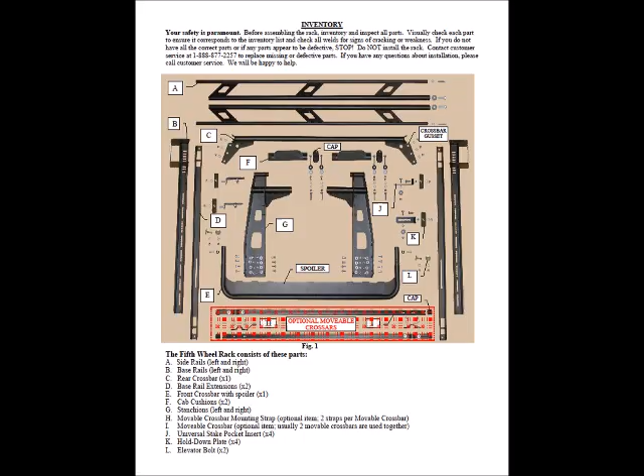Carefully read the written specifications and safe loading requirements and the warranty. Then examine the inventory list. Unwrap and examine each part and compare it with the inventory list. If you find any cracked, broken, or otherwise defective parts, are missing any parts, or have any installation questions, contact US Rack at the toll-free number. We are here to help.

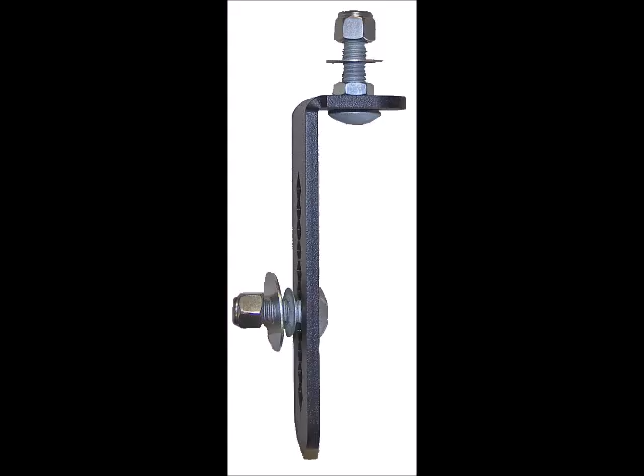The first step is to prepare the stake pocket inserts for installation into the front and into the second stake pocket on each bed rail. Disassemble each insert into its components as shown, and notice the 3 diamond-shaped holes in one end of the insert that will be used to install a carriage bolt. These holes provide a choice of positions on where each bolt will emerge from the stake pocket to anchor the rack to the truck bed rail.

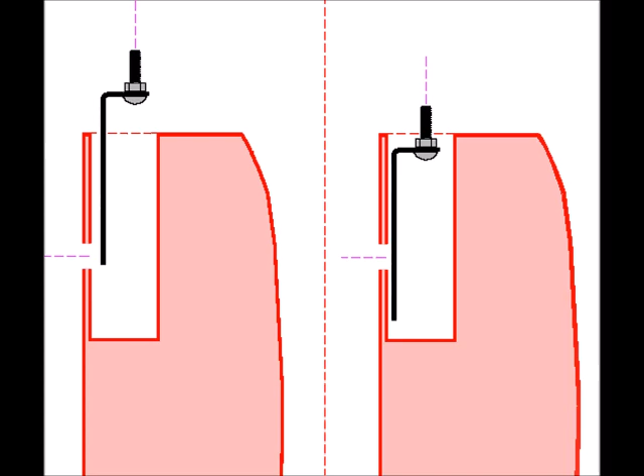Screw a jam nut, which is the thinnest of the nuts, all the way down on the bolt to hold it in place. Holding the insert by the bolt, lower it into the stake pocket so the top of the nut is just below the top of the bed rail. You may mark the insert with a pencil through the hole that leads from the bed into the side of the stake pocket. Remove the insert and install a bolt at the location you marked and hold it in place with a thin retaining washer.

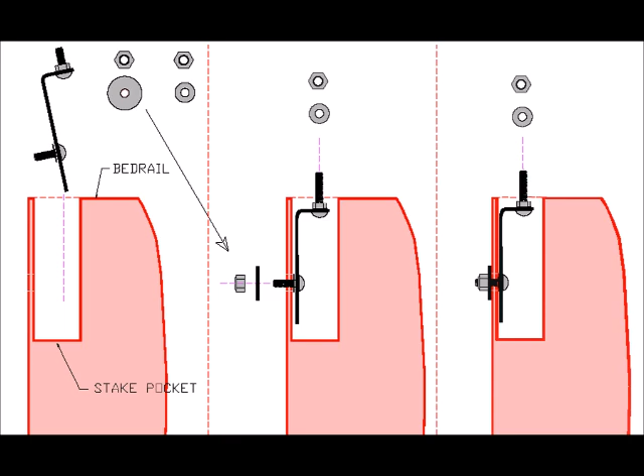Place the insert back down into the stake pocket so this bolt extends through the side hole, and place a 1.5 inch washer on the bolt and loosely thread on a nylon lock nut. Pull up on the insert to make sure the top of the jam nut remains about 1/4 inch below the bed rail when upward force is applied. Then tighten the nylon lock nut firmly. Note that even after applying a dab of grease on the screw, you must overcome the resistance of breaking through the nylon ring on each lock nut to fully tighten it. Install all 4 inserts so they appear as shown here.

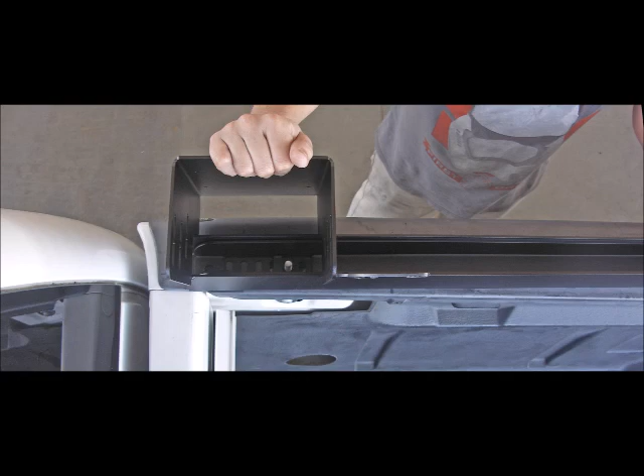Next, install the base rails B from the inventory list and the extensions D shown here. Notice that the extension is narrower than the base rail and sits down inside of it. Place a base rail on the bed rail so the front of the base rail is about even with the front of the bed rail, and so the stake pocket insert bolt goes up through one of the many holes in the base rail. The variety of holes in the base rail provides choices on how far from the edge of the bed rail the base rail will sit.

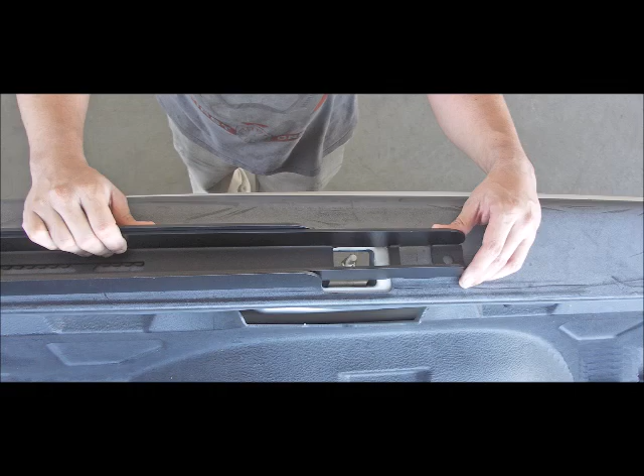Adjust the extension so the bolt extending up from the front stake pocket also goes through one of the large rectangular holes at the front of the extension, and so the bolt in the second stake pocket goes up through one of the holes in the other end of the extension. A hold-down plate will be required to cover the large rectangular holes in the extension. To secure parts in position, place a hold-down plate on each bolt, then add a metal washer and tighten loosely with a nylon lock nut.

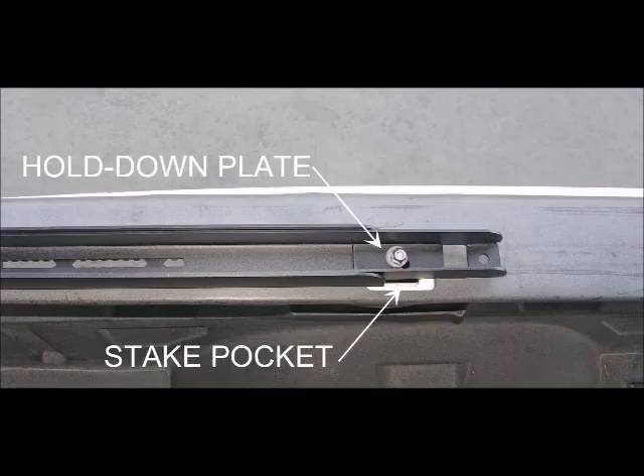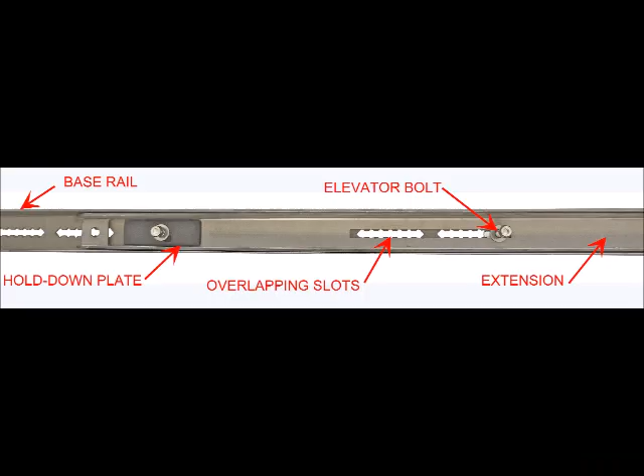With some trucks, the distance between the stake pockets is longer than the extension. This requires the use of elevator bolts to convert the base rail and extension into one rigid assembly that can span both pockets. See how the parts are locked together using the elevator bolts, hold-down plates, washers, and nuts.

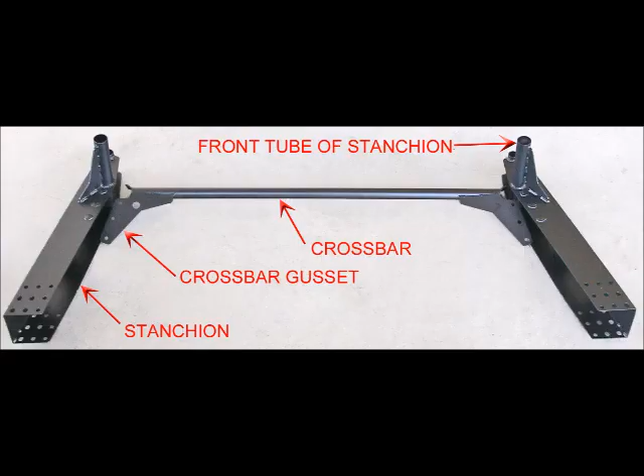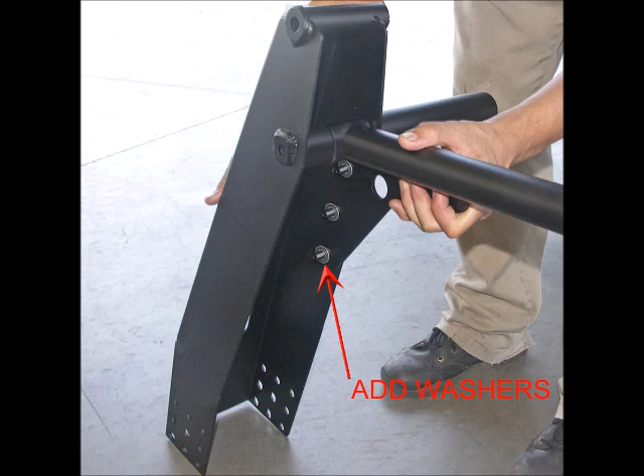Next, install a crossbar D on the inventory list to the 2 stanchions G. To initially orient these parts, place them on the ground as shown, and notice that the 2 crossbar gussets are welded to the front of the crossbar. Stand up the stanchions and align the threaded studs on the inside with the holes in the crossbar gussets. Slide the parts together and place metal washers on the studs. Thread nylon lock nuts onto the studs and tighten loosely.

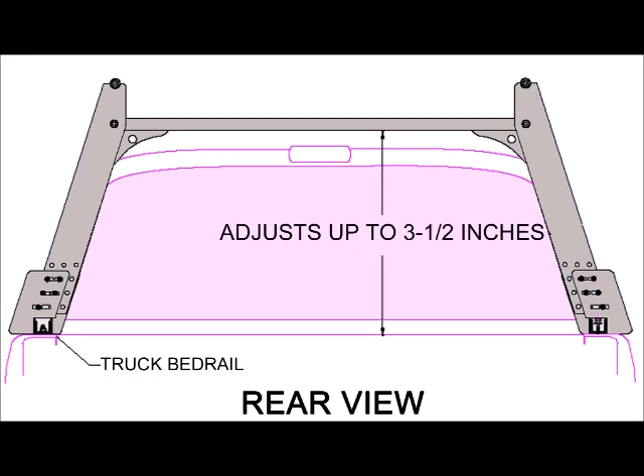To mount the stanchion and crossbar assembly, step up into the bed and slide the bottoms of the stanchions down between the sides of the stanchion housings, which are welded to the front of each base rail. Lower the assembly down to where the bottom of the crossbar is 3 to 4 inches above the roof of the cab, while aligning the holes in the stanchions with the slots in the housings.

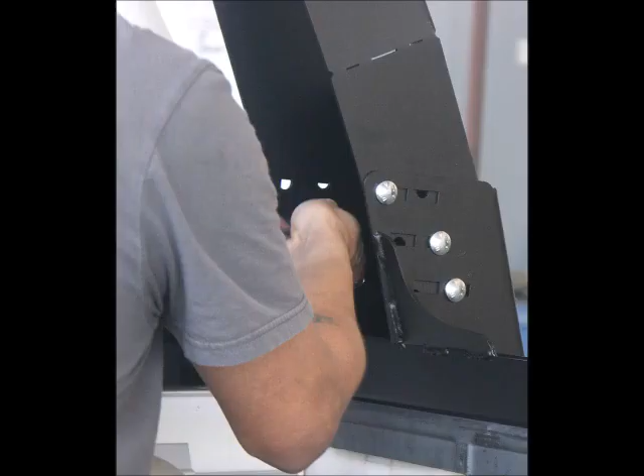To find the right position, it may be necessary to move the base rails closer together or farther apart, by adjusting which holes in the bottom of the base rails the stake pocket insert bolts go through, or by moving the positions of the bolts in the inserts themselves. When the height and width is correct, insert 1-inch long carriage bolts into both sides of the stanchion housings to intercept and hold the stanchions in place. Tighten them, but not too firmly.

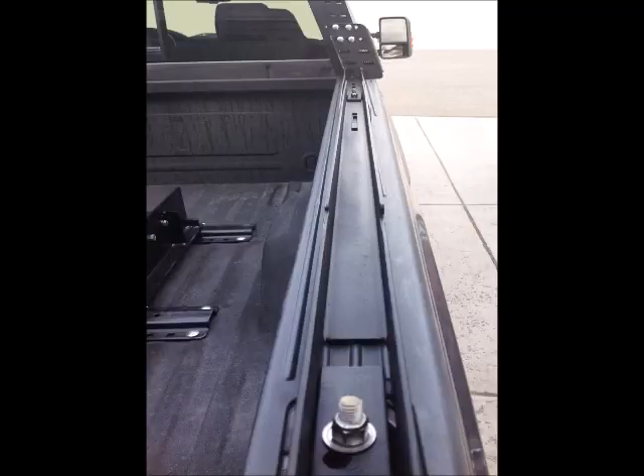Important note: there must be an overlap of at least 2 rows of holes and slots with at least 3 carriage bolts holding the parts to the front and back of the stanchion housings. For maximum stability, ensure that the bolts are spread out as much as possible in the available overlapping holes and slots. Next, attach the side rails A and cab cushions F.

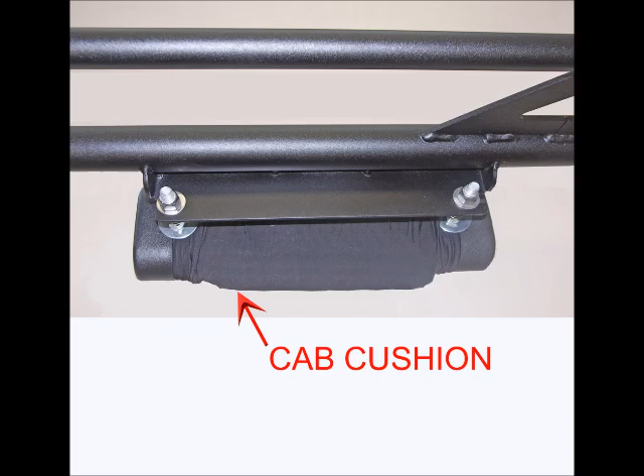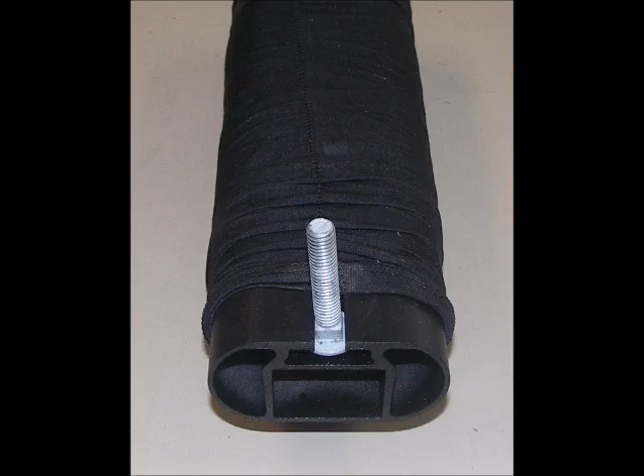Notice that each side rail contains a mounting bracket for the cab cushion. The cab cushion has a number of parts and tools needed to assemble it. There are 2 lengths of carriage bolts. Initially, use only the short 1.5-inch long carriage bolts. Slide them into the ends of the black extruded aluminum body of the cab cushion and pull the black nylon cover up around the bolts and slide on the plastic end caps until they make contact with the bolt.

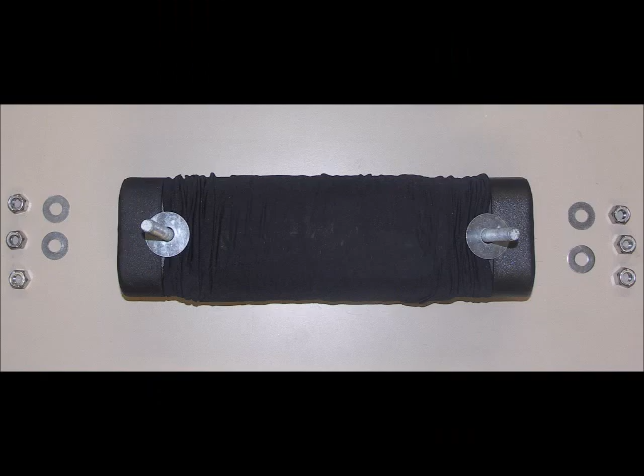Push a rubber washer onto the end of the bolt. This is a tight fit. Place a 1.25-inch OD metal washer on top. These washers will hold the nylon cover and end caps in place. Slide the ends of the bolts into the slots of the mounting bracket. Add small washers and screw on the lock nuts. Screw down each nut far enough to retain the cab cushion in the bracket, but don't yet firmly tighten, for you may have to remove and adjust them later.

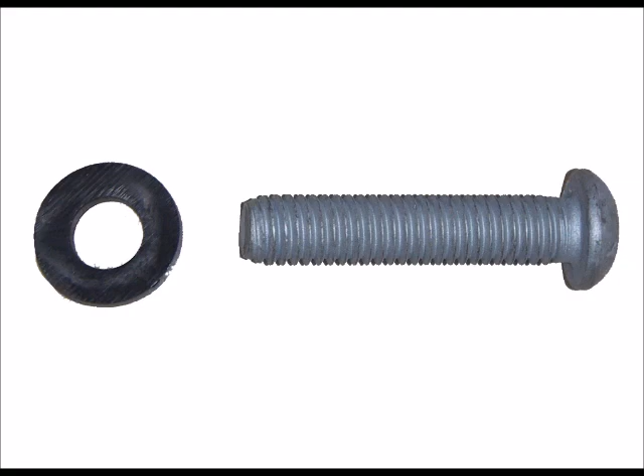To install the side rails over the truck cab, insert the threaded ends of the rails into the tubes extending from the front of the stanchions while ensuring that the cab cushions are on the inside of the rails. Place a black nylon washer onto a 3/8 by 1 3/4-inch long button head cap screw. Insert the screw into the lower hole at the back of the stanchion until it contacts the end of the side rail. Thread it in to the back of the side rail a few turns, but leave it loose.

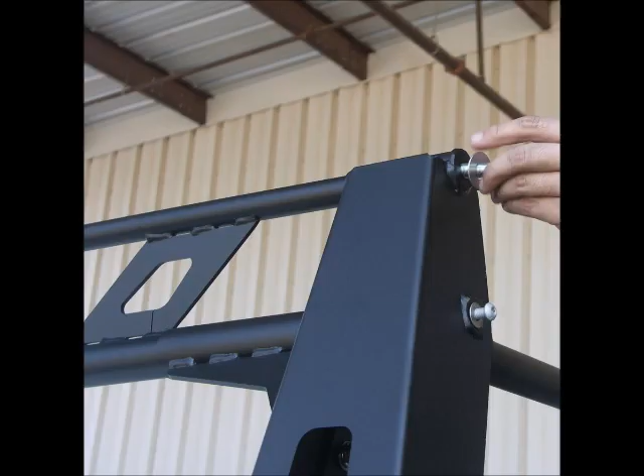Insert the larger fine thread hex screw with a metal washer into the top hole to intercept the threaded end of the other tube and thread it in a few turns. Now tighten the lower screw firmly with the Allen wrench. Tighten the upper screw with a hex wrench. Note that this screw is used to adjust the elevation of the side rail, so don't tighten it more than is necessary to make the side rails roughly parallel to the ground.

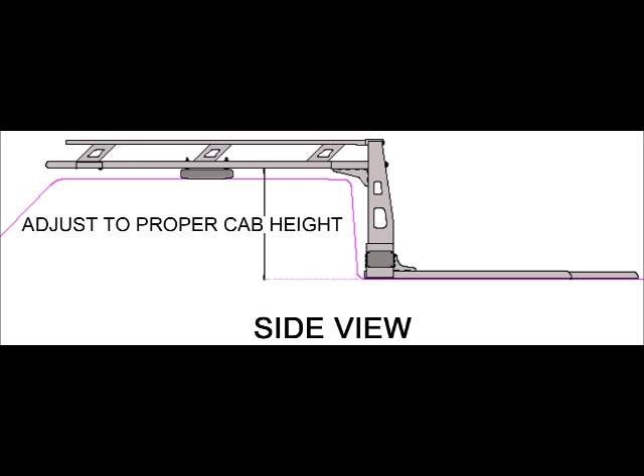If you still need to raise the cushion more, you should raise the stanchions to a higher position in the stanchion housing. If you want less gap above the cab, you may lower the cab cushions by about 1/2 inch by adding a nylon lock nut and washer to the carriage bolts of the cab cushion just below the mounting bracket. If this is still insufficient to bring the cab cushions down to the proper position over the cab, replace the 1.5-inch bolts with 2.5-inch bolts and add another lock nut below the mounting bracket.

Note that the space between the 2 lock nuts can be adjusted to create more or less standoff above the cab. If there is still too much space, remove the bolts and lower the stanchion to lower slots in the stanchion housing. Next, install the front crossbar E in the inventory. Holding the crossbar with the flat spoiler on the bottom, insert the ends of the crossbar into the front of the side rails and shove them almost all the way into the side rails.

Squeeze a modest amount of flexible caulk around the perimeter of the smaller tube to keep water out of the tubes. Then shove them all the way in until the holes in the bottom side of the crossbars and the side rails align. Place a black nylon washer onto a 1.5-inch long button head cap screw and tighten firmly with the Allen wrench, then wipe off any excess caulk.

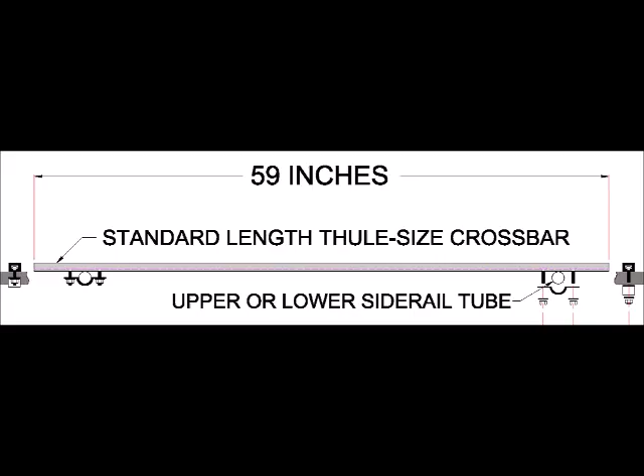The universal fifth wheel rack may be used without the optional movable crossbars, but if you have ordered them, they will make mounting sports accessories much easier, and you will have the additional parts outlined in red shown at the bottom of Figure 1 and shown more closely here. The 59-inch long and the 78-inch long movable crossbars install in the same way. Insert the heads of 2 5/16-inch carriage bolts into each end of the movable crossbars I and replace the plastic caps.

Place the movable bars on top of or below either the larger or smaller tubes of the side rails in a convenient location along the rail. After the bars are positioned, attach the mounting brackets by running the ends of the screws through the holes. Add a metal washer and a nylon lock nut to each bolt and tighten until the brackets wrap securely around the tubes. The movable crossbars can be hung below or mounted on top of the side rails as shown here. They can also be attached to either the top or bottom tubes of the side rails and positioned anywhere along the rails that is convenient to carry many types of cargo.

When installation is completed, it is critical that you check the alignment of all the parts and tighten all fasteners firmly, but not so firmly that you strip, damage, or deform fasteners or other parts. Periodically check the tightness of all fasteners to ensure that none has loosened. Now you are ready to mount your cargo and head to high adventure.